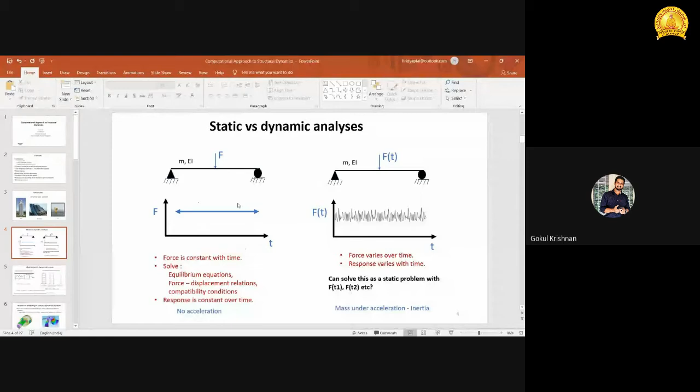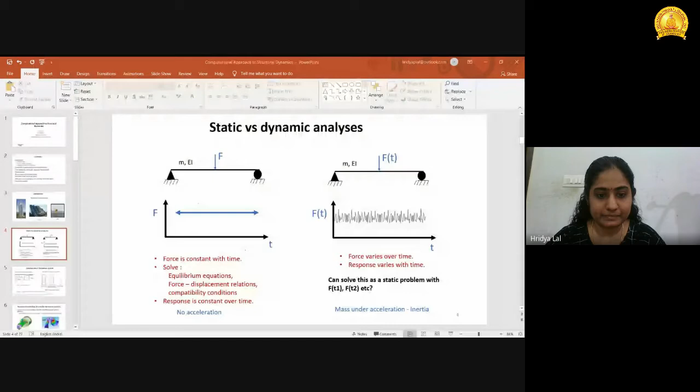Can I interrupt you? The slide is not changing, you're still on the first slide. This is actually slide number 4. No, ma'am, we can see slide number 1. Now it's changing to slide number 4. Oh, okay, maybe I need to share it again. It's fine right now. Yes, hello ma'am? Yes, ma'am.

So what I'm saying is that we need to consider the inertial effect. We all know that if some mass is subjected to some acceleration, it will oppose that force, right? The dynamic force, it will oppose. So we need to consider that also into account. If that inertial effect is so significant that it will equilibrate the external force, we need to consider that as well in the equilibrium equation. Otherwise, if it is not that significant, even if the rate of loading is very fast, we can solve it as a static problem.

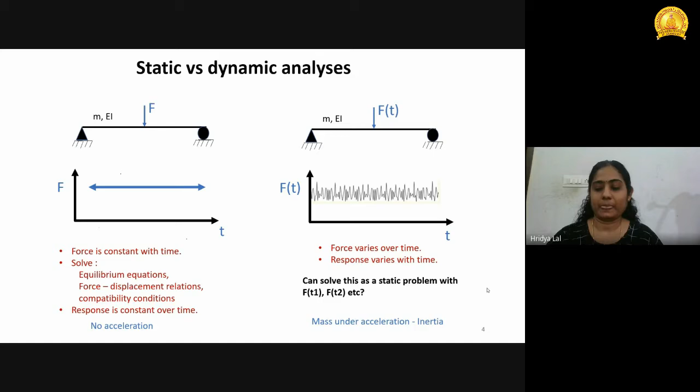So how can we idealize this physical dynamical system? Generally, the first and simplest case is a single degree of freedom system, meaning only one mass is subjected to a dynamical force F of t, which produces a response x of t. Any structure or mass will have its own stiffness property, represented by a spring, K, and also some energy dissipation mechanism involved in it, denoted as C here.

So this is the damping, right? Using D'Alembert's principle or a variational approach, I'm not going into the derivation, but we can model or idealize this physical dynamical system as a mass-stiffness-damper system. Using any principle, we get Newton's second law of motion if we're using D'Alembert's principle. So we derive the equation of motion for a single degree of freedom system: m x double dot of t plus c x dot of t plus k x of t equal to f of t. This m x double dot of t contributes the inertial force, c x dot of t is the damping force, and k x of t is the potential or elastic stiffness force, which all oppose the external force f of t.

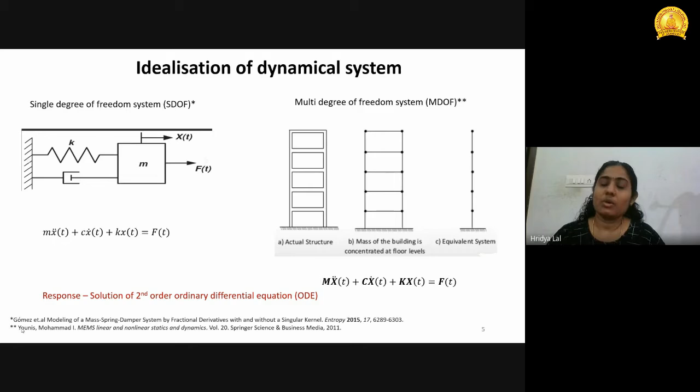So we are dealing with a numerical technique, the finite element model, finite element technique. Other techniques are also there, but for solid mechanics problems and this kind of dynamical system, the finite element method has been proven to be the best and most popular method. People widely use this method, and it has a lot of advantages.

What we are doing with the finite element technique is first discretizing, making equal number of parts of the whole structure. We divide it into a number of elements. Then in each element we assume a displacement solution according to the governing equation, or using the variational approach.

That is the starting point of any problem. Using the variational approach, we can derive the boundary conditions and the governing equation. According to the governing equation, we can assume a displacement solution at each element and at each node.

These elements will connect through a node, and each node will have some degrees of freedom. Depending on the problem, we can simplify it as 2D, 3D, or 1D as well.

Suppose a beam model, we can have a transverse displacement as well as rotation, so 2 degrees of freedom per node. Suppose we have a large number of elements, that many plus 1 number of nodes, times 2, will give a higher order system, a large ordered finite element model.

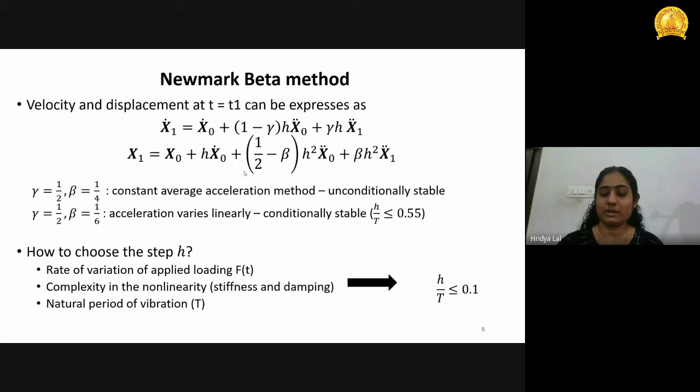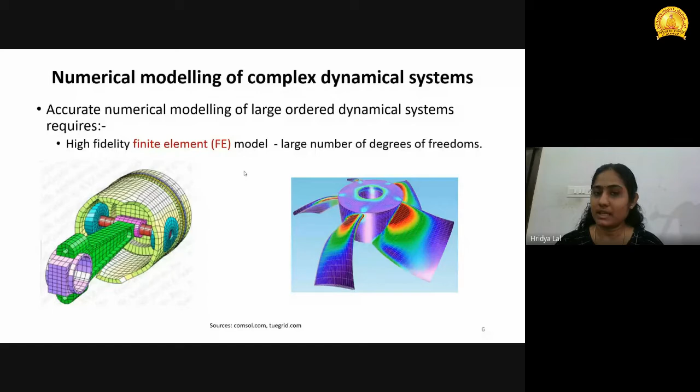One advantage of the finite element method is that it converts the ordinary differential equation into an algebraic equation, making it easier to solve, but the matrix size is a big factor. If we have n degrees of freedom, the size of the matrix will be n by n, the response will be n by 1, and F of t is also n by 1.

So we need to solve that many times throughout the time, varying from 0 to say t1. If we want a more accurate result, we choose delta t lesser than T times 0.1. So we need to solve at that many time ranges for these large ordered systems.

So it will be computationally prohibitive, right?

So one conventional way is that we can represent the physical coordinate response, x of t, in a modal coordinate. Modal coordinate means in the modal domain actually. So that's how we can project the modal coordinate response into some basis function.

That means here the basis function is nothing but the eigenvectors. Phi is the mode shape of the system. Once we solve the eigenvalue problem, we get the natural frequency as well as the mode shapes. So mode shape is acting as the basis function, and this is orthogonal, that we all know.

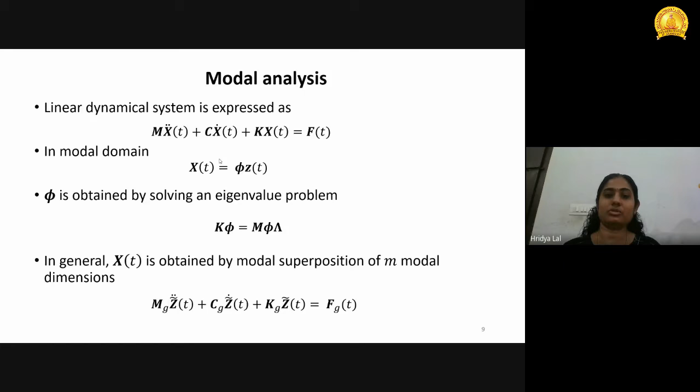So that is the main one we need to consider, that degree of freedom, and also some other degrees of freedom as well. So we can have a small set of degrees of freedom that is far lesser than the n number of degrees of freedom. So again we can have a reduction in calculating this. So that is what I am going to show here: model order reduction technique.

So for that we have some techniques to reduce this. Why do we need a model order reduction technique? One thing is, if we have a high fidelity model, we have to do an eigenvalue analysis. But for time integration analysis, it will be computationally more efficient if we consider the reduced order model.

Also, another reason is that if one is doing an experiment, they can only keep an accelerometer for a few masses, a few degrees of freedom. Maybe rotational degrees of freedom they cannot capture in the experiment. So if they want to get that response...

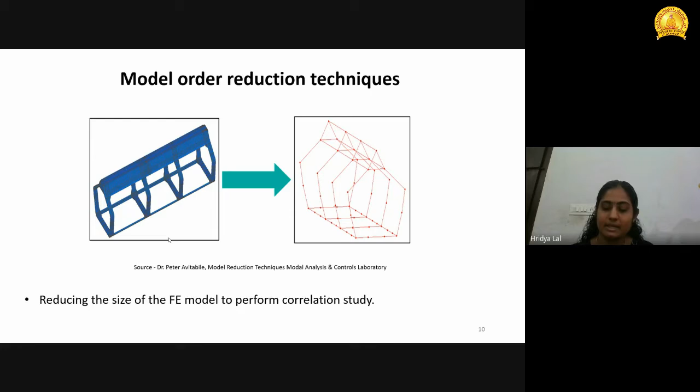So a lot of techniques are there, already given in some books. Some are Guyan reduction, dynamic condensation, system equivalent reduction expansion process, and so on. Here I have used the system equivalent reduction expansion process in my study.

Why? Because Guyan condensation is related to, also known as static condensation. That means it considers only stiffness matrix, not the mass matrix or inertial effect, to make the reduced order model. So it will always show a high value of the natural frequency of the reduced order model. It will overpredict this, since it is not taking into account the mass effect.

Dynamical condensation takes the mass effect into account, but if somebody is interested only in one natural mode, then dynamical condensation will be good. But if we want a certain range of natural frequencies of the dynamical system, then one can use system equivalent reduction expansion process. This is the SEREP technique, which we can use for both reduction and expansion. These other techniques can also be used, but this is the more accurate and most widely used technique.

So the basic idea of this model order reduction, as I have already told: first we have a full order system with n number of degrees of freedom. We are splitting it into active degrees of freedom, or master degrees of freedom, and deleted degrees of freedom, or slave degrees of freedom. We retain in the reduced order model only the active degrees of freedom, and we create a transformation matrix T, which relates Xn, the full order system, into the reduced order system.

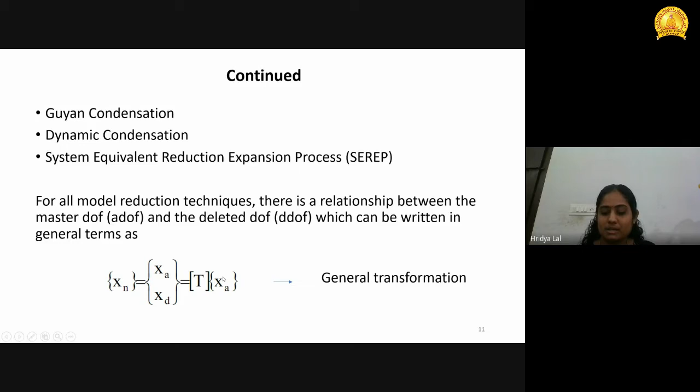So this is the general transformation matrix we need to derive. Using that transformation, we can obtain the reduced system matrices: mass matrix, stiffness matrix, as well as damping matrix. For damping, we have classical or Rayleigh damping, like proportional damping, or non-classical damping. For non-classical damping, we need a different kind of analysis, since it's not proportional to mass and stiffness, so the matrices will not be symmetric in nature. We need to adopt some other mathematical approaches.

Once we have the system matrices, we can solve the reduced order eigenvalue problem and obtain the natural frequency and mode shapes. Then we can match with the full order system.

So how do we obtain the transformation matrix using the SEREP technique? As already discussed, we are splitting into active degree of freedom and deleted degree of freedom, that is Xn. Also in modal domain, we can represent this using phi into Z, which is the relationship between physical coordinates and modal coordinates.

And here phi n, again I am splitting into phi A and phi D. That's the mode shape corresponding to active degrees of freedom and mode shape corresponding to deleted degrees of freedom. But the number of modes, we are keeping only m modes. So here size of phi A is A by m, size of phi D is D by m. A plus D equal to n actually.

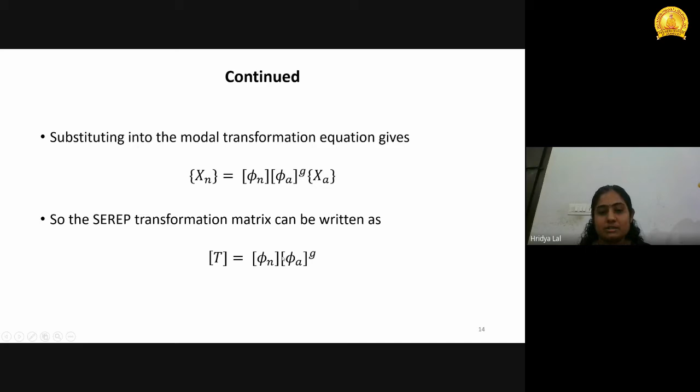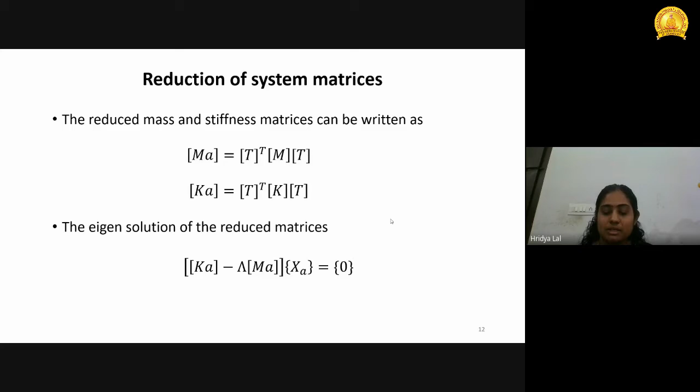Once we obtain the transformation matrix, we can get the system matrices, reduced order system matrices Ma and Ka. Then we can easily solve for the response, I mean do the time integration analysis, this the reduced order model.

So what are the advantages of this SEREP technique? Here, the eigenvalues of the reduced system always equal the eigenvalues of the full system for the modes of interest retained in the model. I have already told, if suppose we are considering only m number of modes, then it is easy to represent using SEREP.

Here, the reduced order model also will give us exactly same as the full order system's natural frequencies. And also, the modes that are preserved in the reduced model may be arbitrarily selected from those modes of interest in the original model. So what I'm saying is that we can arbitrarily choose the number of modes.

Maybe we have 10 number of degrees of freedom. We have 10 modes as well, right? 10 natural frequencies. Maybe we can keep only 3 modes, maybe first 3 modes or last 3 modes or in between some 3 modes. So, whatever modes we are keeping, we will get exactly the same as the full order model's natural frequency.

And eigensolution of the reduced system is exact and does not depend on the location or number of points preserved in the reduced order model. That means, the selection of active degrees of freedom is also arbitrary. That means how many number of degrees of freedom we should keep in the reduced order model is also arbitrary actually. Actually speaking, this depends upon the problem of interest.

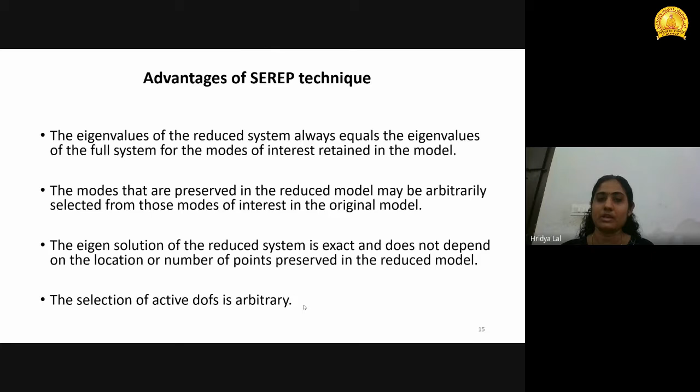Here, I have considered a cantilever beam subjected to tip load, dynamic load f of t. So here I have discretized into 5 elements. Each node will have 2 degrees of freedom. One U1 represents the transverse degree of freedom. V1 is the rotation, okay.

So these are the geometrical properties considered. And here we can see 600 is the external frequency. So what I did is I did natural frequency analysis, eigenvalue problem, I solved for the full order system and SEREP model as well. So this is the FRF, that is frequency response function graph, it is shown here.

So we can see that we have 10 number of modes actually, right? So these are 10 modes. Peaks represent the natural frequency of the FRF. Peaks are the natural frequency of the system.

But I have considered 2 different cases. First is I considered only first 3 modes and first 3 degrees of freedom. That is U1, V1, and I kept U1, U2 and U3 actually. Then I considered modes 4, 5 and 6.

So using that, I have M and K as 10 by 10, but I reduced it to 3 by 3 in the reduced order model, and I got the first 3 modes - whatever modes I considered in the reduced order model - exactly same as the full order model.

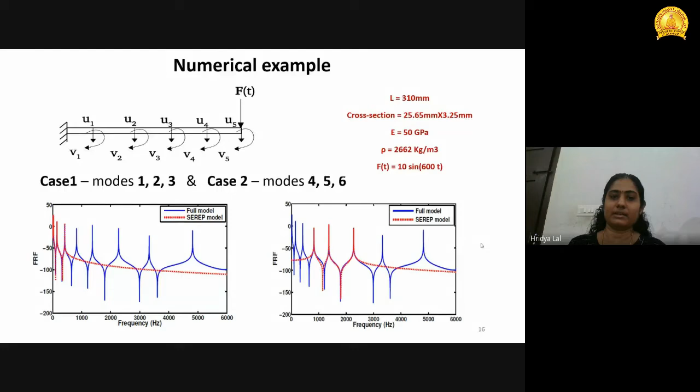We can do model truncation using modal analysis - we need to understand how many dominant modes to keep in the reduced order model, and what degrees of freedom to select. If one is interested only in natural frequency analysis, the degree of freedom selection is arbitrary. Otherwise, if one wants to find the response, we need to choose depending upon the objective of the problem.

Next, introducing an advanced topic that people have also worked on: consider a stochastically parametered or stochastic linear dynamical system. That means here the mass, stiffness, and damping force - everything is random. This is a fully stochastic linear system, and I can represent it as a function of theta, where theta is a random variable or random field.

That means it is homogenized, but it will vary - we cannot predict the exact value. Like E equal to, suppose Young's modulus is 210 gigapascal for steel, but some variation will be there. That is randomness.

So if we consider that, the analysis becomes computationally very cumbersome. So we can adopt a reduced order model for this stochastic dynamical system as well. The only change is that we need to consider, at each random variable, that we can generate samples.

Suppose Young's modulus is random, following some distribution - Gaussian or log normal, as you might have learned in mathematics. Some distribution will be followed, so we can create 10,000 samples like that, and that many deterministic analyses we have to do.

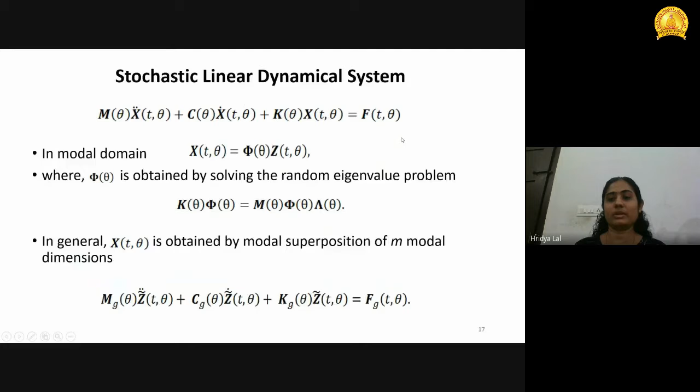Here I've shown the same cantilever beam which I showed for SEREP. I considered E as log normally distributed with 10% coefficient of variation. So what I performed was just a random analysis, not the SEREP analysis - with MCS and PCE, MCS with 10,000 runs, actually 10,000 deterministic samples I have generated.

So, log normal distribution - okay, so it took this many seconds. But for PCE only, we need to run only 3 deterministic runs, so obviously computational time will be lesser.

So my thesis combined these two techniques, SEREP and PCE - the SEREP I have extended in the stochastic dynamical system using PCE to create a reduced order stochastic dynamical system. This is known as the PCE-based SEREP algorithm I developed.

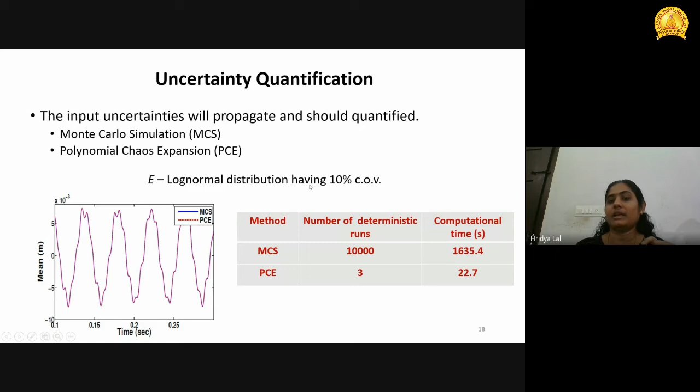So what I did is the SEREP formulation using PCE. In terms of each collocation point, PCE - polynomial chaos expansion - can generate some collocation points depending upon the input distribution. At those points only we need to solve the system. So that represents Xi here.

So we can have the same procedure to obtain the coordinate, all the transformation matrices, and the reduced order model here. MA, CA, KA, FA represent the matrices and vectors and force vectors, everything in the reduced order model. So we will get this, and once we obtain this, we can do analysis.

So I'm just showing some of my work results. For that, I created 3 different models - PCE full model, that is the stochastic full order dynamical system, M2 that is the PCE SEREP model, and M3 is used to compare or validate M1 and M2. M3 is the full model.

MCS is the benchmark method. I have already told you that we are generating n number of samples to represent that input distribution properly, so that it will propagate as we discussed earlier. So M3 is the MCS.

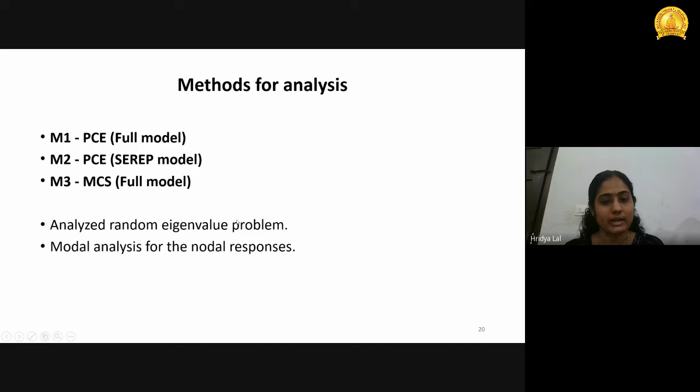So first I did random eigenvalue analysis, then I did the nodal responses I found out using modal analysis. So this is an airfoil, NACA 0012 airfoil. In COMSOL software, commercial FE software, I modeled this aerodynamically forced wing-like structure.

Actually it is not aerodynamically forced - it is not a two-way coupled problem. I consider it as a structural problem actually. This is not a fluid structure interaction problem.

So to get the loading, I just applied P sin omega t, but that omega is the flutter frequency. Flutter frequency means where resonance happens - it should not happen, the resonance, right?

So that flutter frequency I found out using some quasi-steady aerodynamic approach and all. That means where this curve will change sign from negative to positive or positive to negative - that point, the velocity corresponding to that point will give us the flutter velocity or flutter frequency.

First, what I did is I obtained the flutter frequency as some 0.9833 or something, and I found out the natural frequency - first 10 modes I found out. So frequency in hertz is represented here.

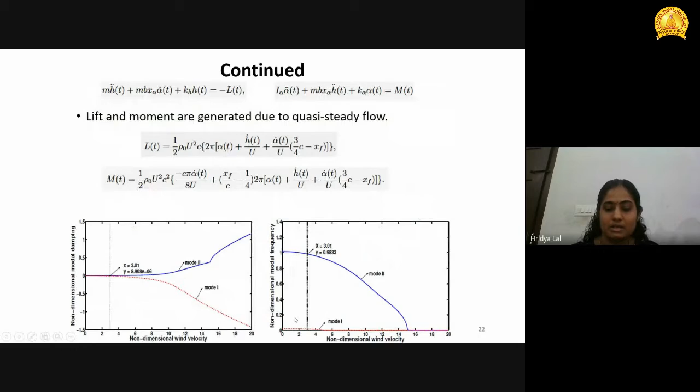But I have considered 3 different models. I think 30,102 degrees of freedom I have modeled - this is a very fine mesh, but out of that I considered only 50 degrees of freedom and first 50 modes. 3 models I created, 3 reduced order models.

Then 30 modes and 30 degrees of freedom - these are all arbitrarily chosen. And A equal to M equal to 10, first 10 modes and first or arbitrarily selected 10 degrees of freedom.

So here I have considered both mass density and E, Young's modulus, are log normally distributed with coefficient of variation 10%. And for the collocation points, 16 collocation points, and we have some polynomial chaos expansion terms - only 10 terms are required.

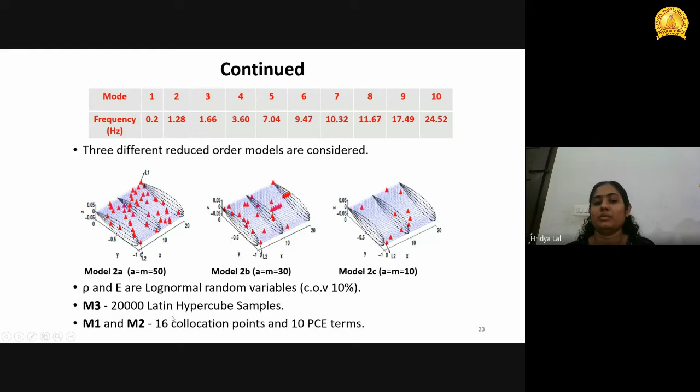So here we are running 20,000, but we need to run only 16 for the PCE that we need to consider.

So this is showing the mean - mean of the response. Tip response, near to the tip, I have plotted the mean. So we can show that M1, M2 are exactly matched with M3, that is the benchmark MCS. So M2 is the reduced order model.

Here also, this is the extreme value stress, that is near to the fixed end, cantilever fixed end.

This is showing a PDF, that is probability density function. That means these are the stress values at t equal to maximum, the value of stress at some particular time t. Out of the 20,000 samples, or 16 samples I've shown, I found the maximum stress value, saved it as a vector and plotted it here. So how probable is this actually? That is shown here in the PDF.

Around 3 to 3.5, the maximum probability of the stress occurring is in this range. From this we can observe that this method, the PCE based SEREP model, is able to exactly match the result of the full order system, that is M3.

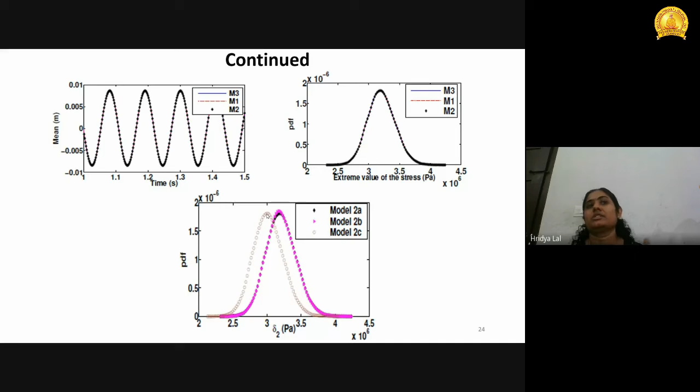In the third figure, I have compared three different models. In a deterministic way, we thought the first 10 modes are enough to capture the dynamics, but that is not the case. This PDF is not able to predict model 2C with only 10 modes. The uncertainty is affecting the natural modes as well, so we need to keep at least 30 modes in the reduced order model.

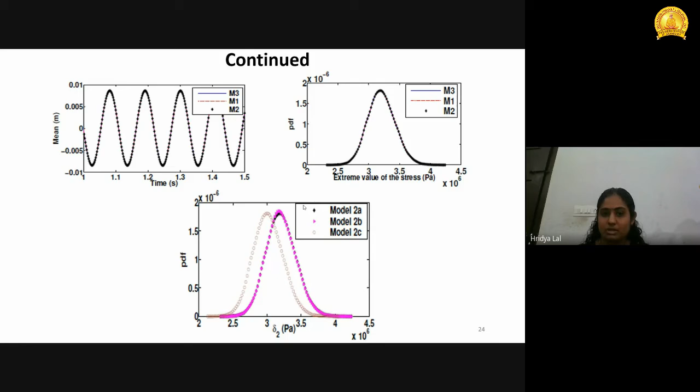These are some results I have obtained, and I want to show the computational time comparison of these models. For model 2A, considering 50 by 50, it took only 4.4 minutes to complete the analysis. If I'm interested in some tip response or response at other points, we only need to consider those, and selecting the modes carefully is very important, depending upon the external frequency.

By keeping only 50 by 50, reducing from 30,102 by 30,102, I got exactly the same result as the full order model M3, which took 4.5 days to finish. So we can observe that the reduced order model is about 1 by 36 times faster than M1, and 1 by 1472 times faster than M3.

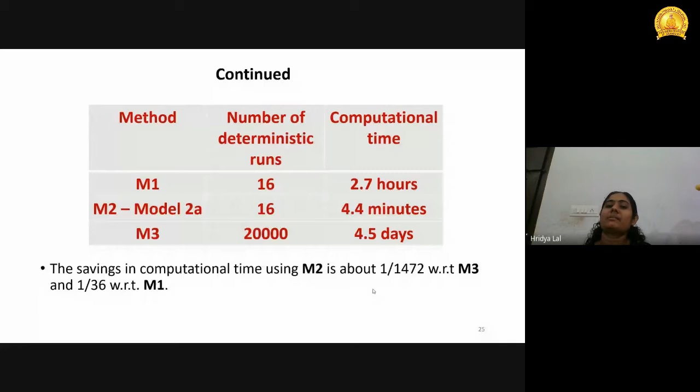With this I am concluding. What I have considered here is a linear dynamical system, and analysis of this dynamical system has been carried out. For large order, complex dynamical systems, closed form solutions are difficult to obtain, so we go for a numerical approach, using the finite element method to analyze the problems. We have also explored model order reduction techniques for both the deterministic as well as the stochastically parametered linear dynamical system.

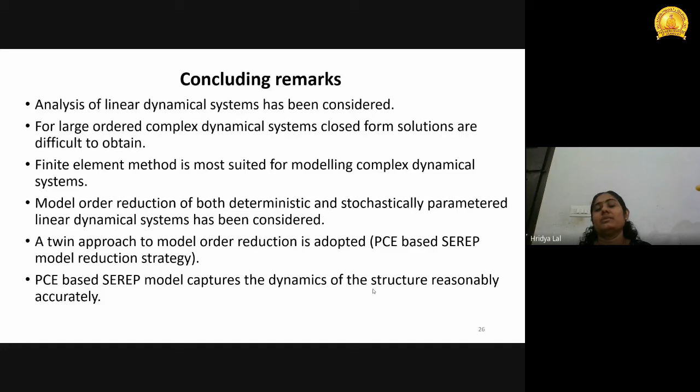For that, we have adopted a twin reduction based approach, that means SEREP and PCE, to develop a reduced order model. This PCE based SEREP model is able to capture the dynamics of the structure reasonably accurately and efficiently, computationally very efficiently. Thank you. If you have any queries, I am happy to answer.